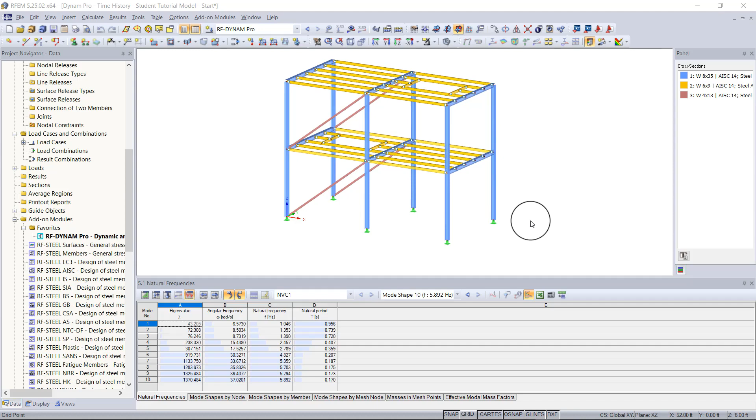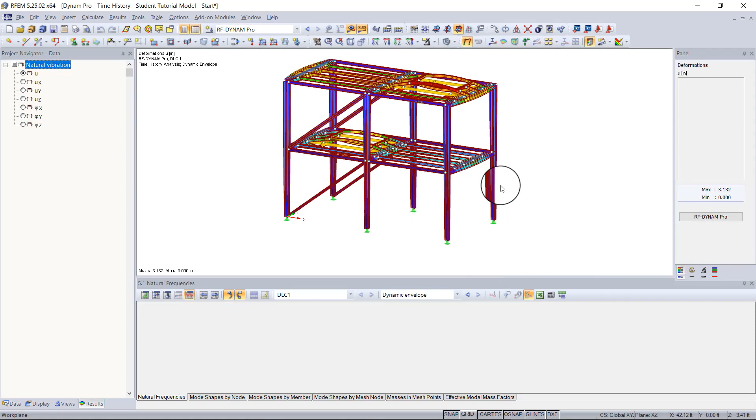So all we need to do now is go back into the RF-DYNAM Pro add-on module and pick up where we left off in the first video, which is we have everything entered here within our input data. So all we need to do now is hit OK and calculate. So once the calculation is finished, you can see that right now we are under the RF-DYNAM Pro add-on module still and viewing our deformations within RFEM.

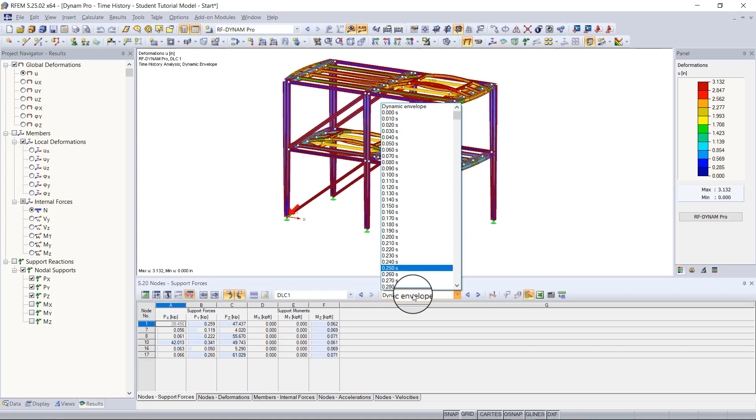What we can do is go to our tables down here and go to specifically table 5 dynamic analysis, and then under the drop down box here we want to select our dynamic load case 1, and then on the right hand side here we can check out our dynamic envelope, which is the worst case scenario from our analysis, but we can also take a look at the multiple timestamps that we have here as well.

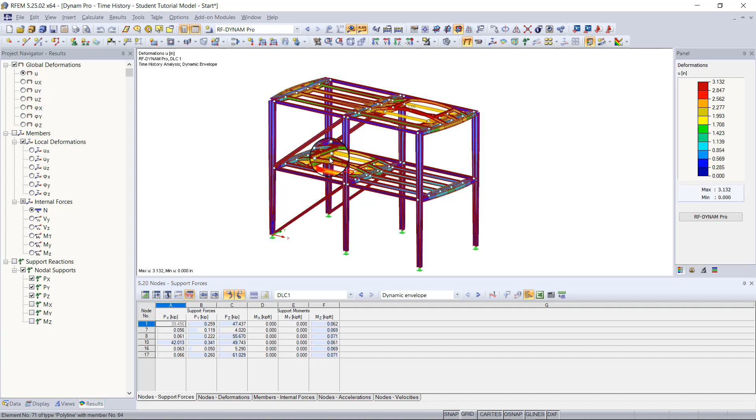So now we're viewing our maximum deformations. So this is our results from our forced vibrations linear time history analysis, and from the machines that were placed at the top and the bottom section. And we can also show an animation of this deformation. So if I go up and click this button, right now it is pretty slow because it's going at each time step, but you can see how those deformations are happening over a period of time.

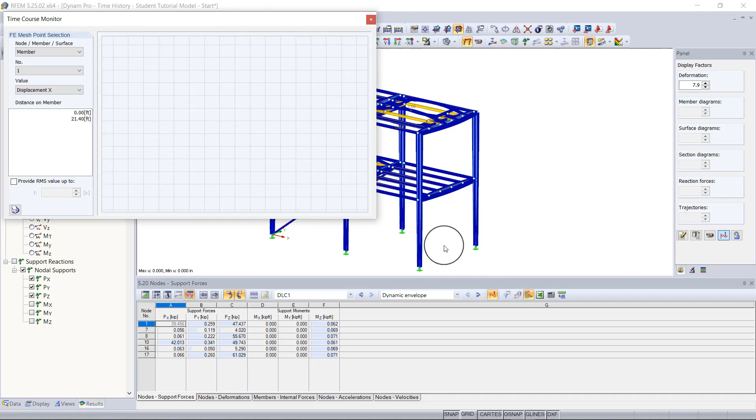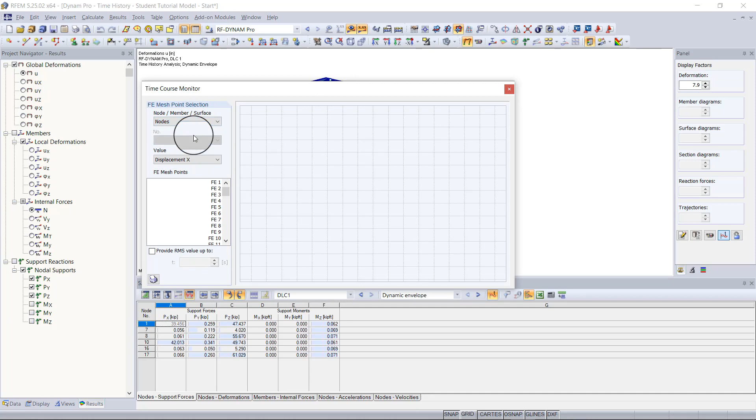Next thing we want to do is show the time course monitor. So that's down here in the tables, so we can click on this button, time history analysis. And what this will do is pop up a new window, and right now we're not showing any function, but if we did show a function here, it would be over time, and we can select any possible object within our model. So what we want to do is show the node at the point that is at the highest deformation, so that will be basically right next to the location of our machine here.

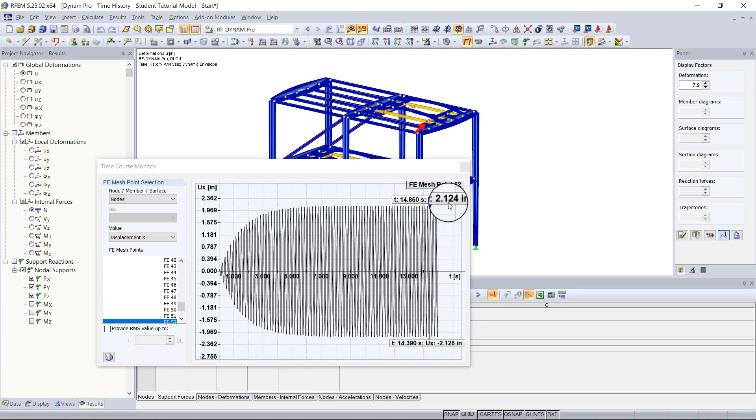So we'll click on that, and then you'll see that we're showing the displacement in the x direction. So you can see our displacement is shown over time, and this is given to us in inches, and you can see the maximum displacement is 2.124 inches. But really we're less interested in the displacement and more interested in the acceleration in the x direction.

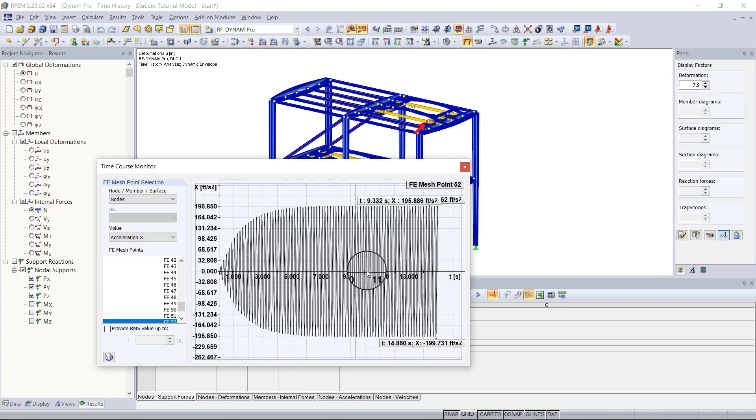So if I go here to value and I click on acceleration in x, now you can see we're looking at the graph here, and you should be able to see this is a good example of resonance. So our acceleration is starting at 0 and increasing and increasing, and this would basically go on forever if it wasn't for the damping coefficients that we placed. And you can see that our maximum acceleration in the x direction is about 200 feet per second squared.

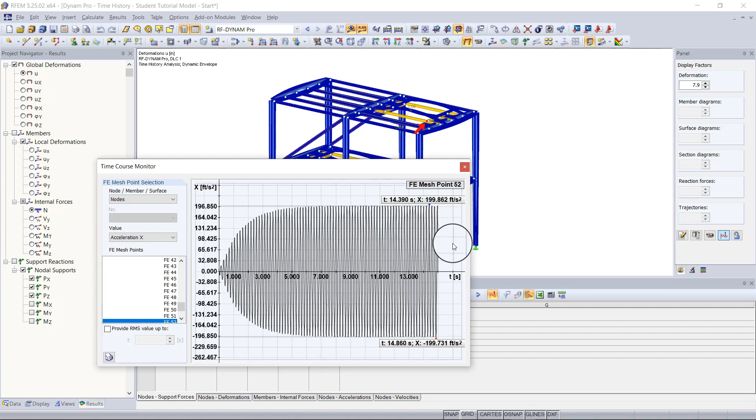And for those of you who might need a refresher, resonance is when two vibrations or frequencies share the same period. And when this happens, these vibrations will be amplified and can cause high accelerations and in turn high forces on your structure. So basically right now the frequency of our machines is matching the maximum frequency that we saw in our natural vibrations case. So if we go back to our natural vibrations and scroll all the way down to our natural frequency of 5.892, this is matching up with the frequency of our machines. So when the machine frequency matches up with the natural frequency of the structure, this is what causes resonance.

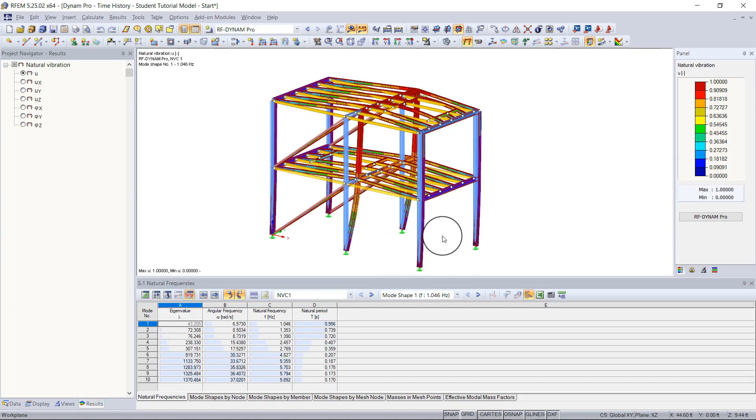So basically what we want to do is get a different natural frequency of our structure, and to do this all we need to do is change the stiffness of our structure, and we can do that by changing maybe the cross sections of our columns here. So I will just turn the structure here and I will select our columns, and I will shrink these to something smaller to change the stiffness.

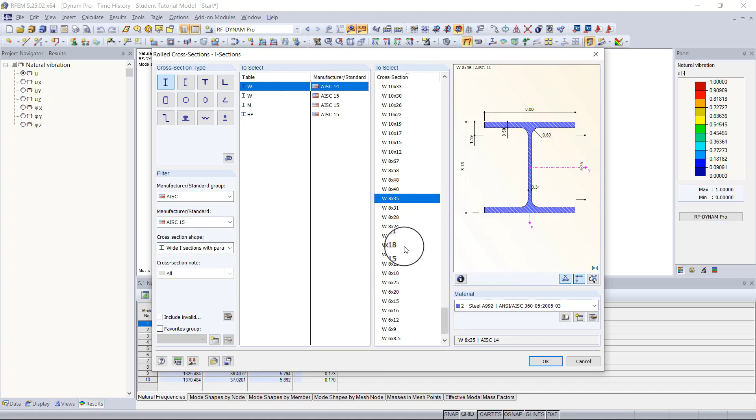So we can double click on them, go in and edit them, and up here we can then select our cross sections. So let's select something smaller, like a W6x25. We'll click OK and click OK again. We'll have to clear our results. And now we can go up here and run our results again by going to calculate all.

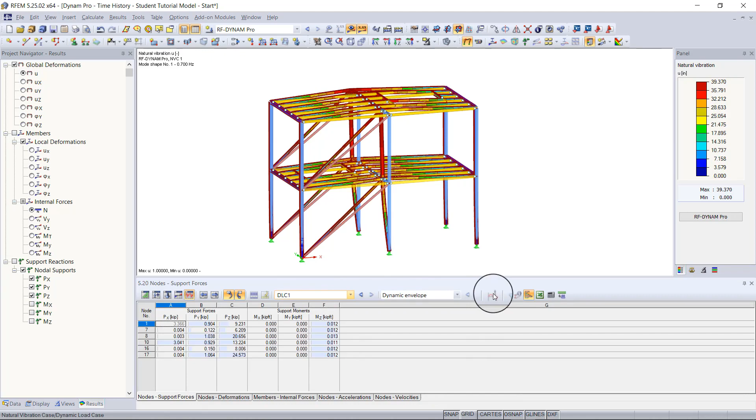So now that all of our results have run, we can go back into our table 5 here and go back to our dynamic envelope from our dynamic load case calculation. And we can click and look at our time course history monitor again. We want to view the node that's right next to our machine, and then we want to see the acceleration, and then we can click on our node graphically.

And now you can see that we are no longer seeing resonance, so our max acceleration is now only 20 feet per second squared, and you can see that we are no longer seeing that divergence of acceleration, and we're at a stable acceleration for the course of time here in 15 seconds.

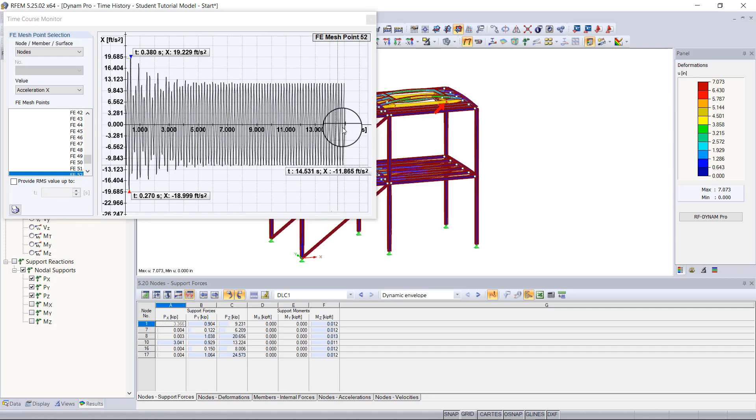So now this is where the video tutorial comes to an end, and hopefully you learned a lot throughout these two videos on how to perform a linear time history analysis on a structure, and I thank you for watching.